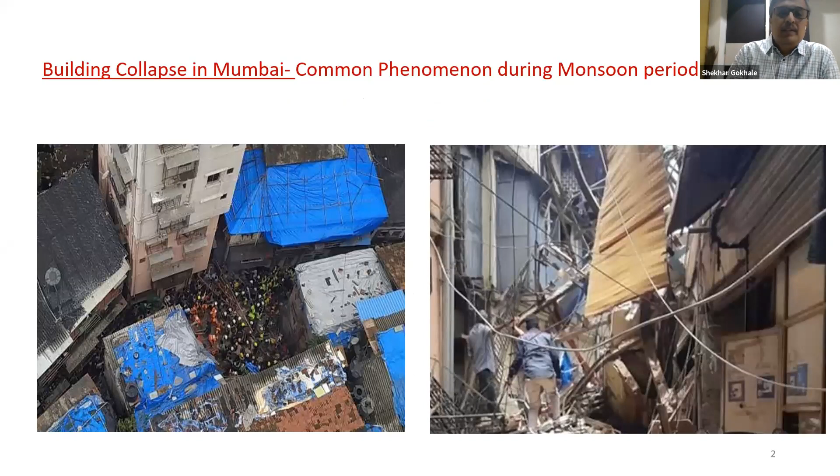I will start with today's topic. This is a very common phenomenon during the monsoon period every year in Mumbai, where there are a number of building collapses for the last so many years. Recent ones are the Bhendi Bazaar collapse of 2018 and the staircase collapse of a Khar building in 2019. These are the two latest collapses in Mumbai.

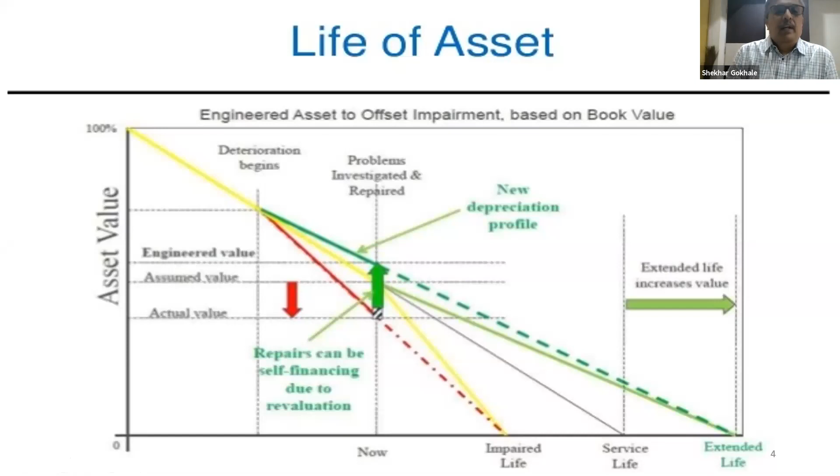Now let us come to the structural audit. What is structural audit? Structural audit is an overall health and performance checkup of a building, like a doctor examines a patient. Structural audit is an important tool to know the real status of the building and should highlight and investigate all the risk areas and critical areas.

We can list out the purpose of structural audit as follows: to save life and property, to know the health of your building and to project the expected future life, to highlight the critical areas that need to be attended to with immediate effect, to proactively assist the residents and the society to understand the seriousness of the problem and the urgency required to attend to it, to increase the value of the asset by timely analyzing the condition of the building, and to comply with municipal or any other statutory requirements. These we can state as the purpose of the audit. This basically gives proactive assistance to the residents to understand the seriousness of the problem in advance, so that the building can be repaired before there is any problem with the building.

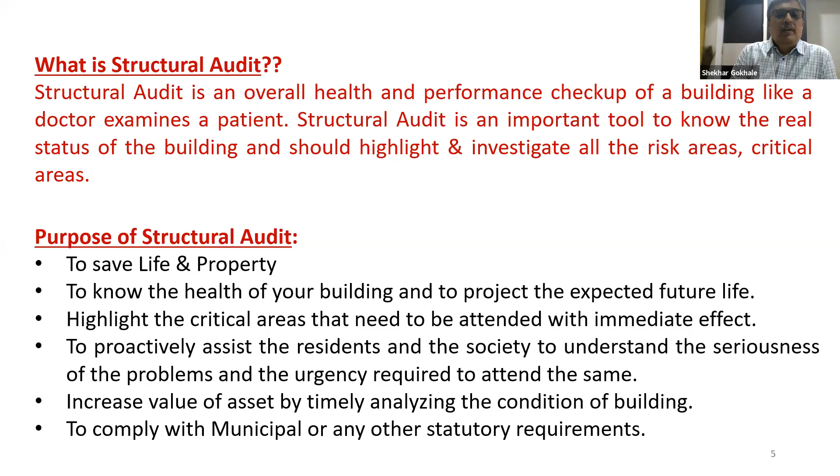There are certain statutory provisions made in the bylaws, like the amendment made in the Maharashtra Municipal Corporations and Municipal Councils Act 2008, dated 7/2/2009, in which structural audit has been made mandatory. Then, to check the fitness of the buildings for human habitation is made in this provision. Examination by structural engineers is made in this provision, and it has been enforced with immediate effect. So all these municipal acts are amended. In the Mumbai Municipal Corporation Act 1888, insertion of section 353B has been introduced.

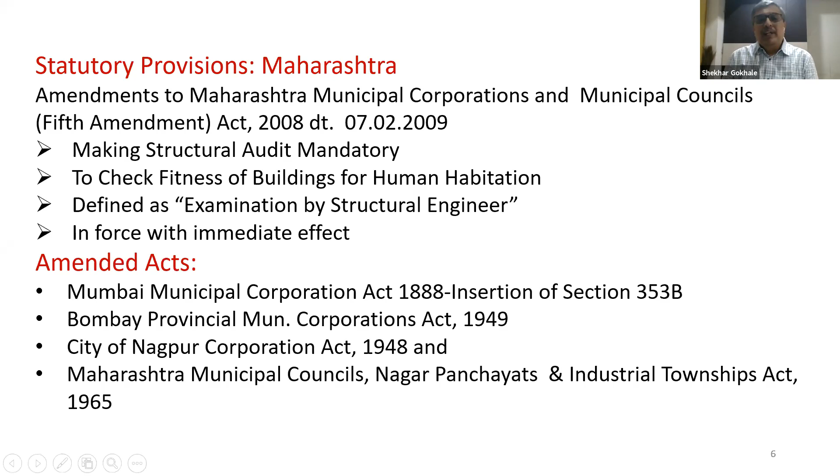Similarly, the model bylaws of the cooperative societies are also amended. There is a clause 77 which says that the society shall cause the structural audit of the building in the following cases. Up to 15 years from the completion of construction, no audit is required. Between 15 years to 30 years, audit is required to be carried out every 5 years. And beyond 30 years from the completion of construction, structural audit is required to be carried out after every 3 years.

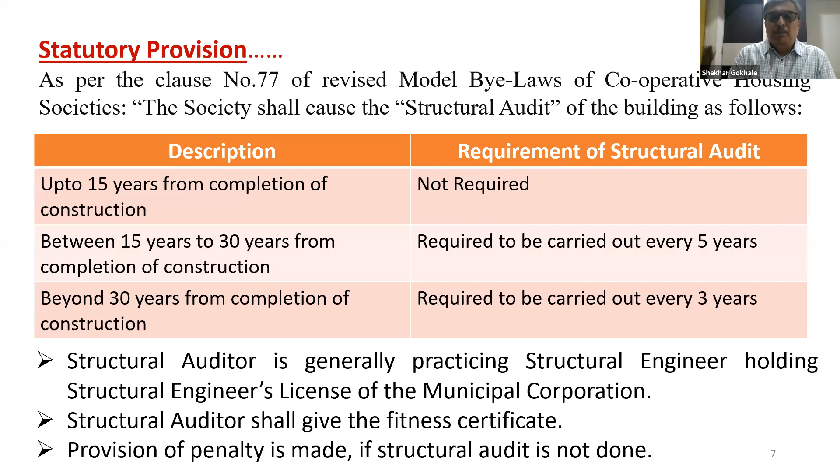So a structural auditor is generally a practicing structural engineer holding a structural engineer's license of the local municipal corporation, and the structural auditor shall give the fitness certificate to the building. And there is a provision of penalties also made if structural audit is not carried out. So these are the changes made recently in the last 8 to 10 years in the bylaws and in all the statutory provisions. In Mumbai Municipal Corporation, they call it section 353B, which is inserted in the original MMC Act of 1888.

Because of this change made in the bylaw, the municipal corporation is authorized to ask the societies or building owners. They are empowered to exercise their power under this act to ask the owners of the building to get the building examined by a licensed structural engineer and submit the structural audit report within 30 days.

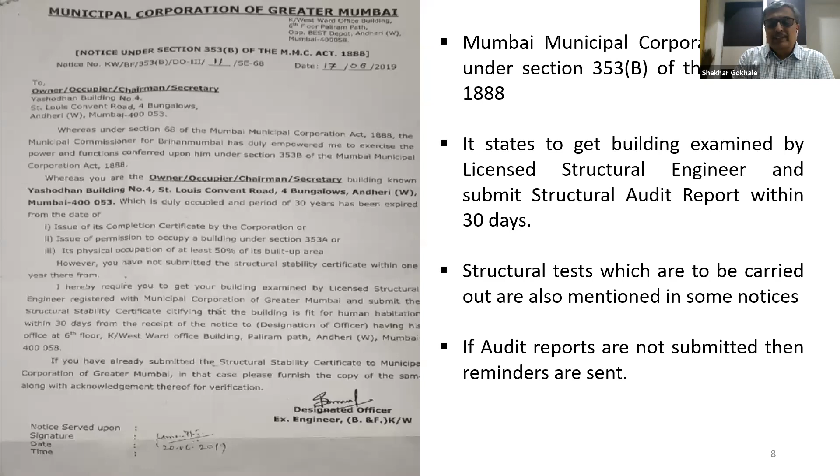Now, to carry out the structural audit, to what extent should we assess the building? We have made 3 levels. Level 1 is a condition survey. Level 2 is a little more detailed survey, and level 3 is structural analysis and capacity checking of the structural members. Normally, we do level 1 and level 2 checks. Level 3 checks are not normally done.

Level 3 checks are normally done for buildings where you want to extend the building, like if you want to add a number of floors on an existing old building. In that case, we go up to level 3, wherein we need to analyze the structure again as per the latest and present codes, and then arrive at a conclusion whether the extension of the building is possible or not. Or in the case of dilapidated buildings, where the structure is quite distressed, then we need to carry out these level 3 checks.

So normally, level 1 check is a condition survey where a physical or visual condition survey of the building is made. Then drawings are studied, the history of the construction is understood, and any rehabilitation work carried out earlier, that information is gathered from the owners of the building. This level of assessment is based on experience. Based on the structural engineer's experience, he will visualize things, he will understand the crack pattern and all that, and based on that, he makes the assessment.

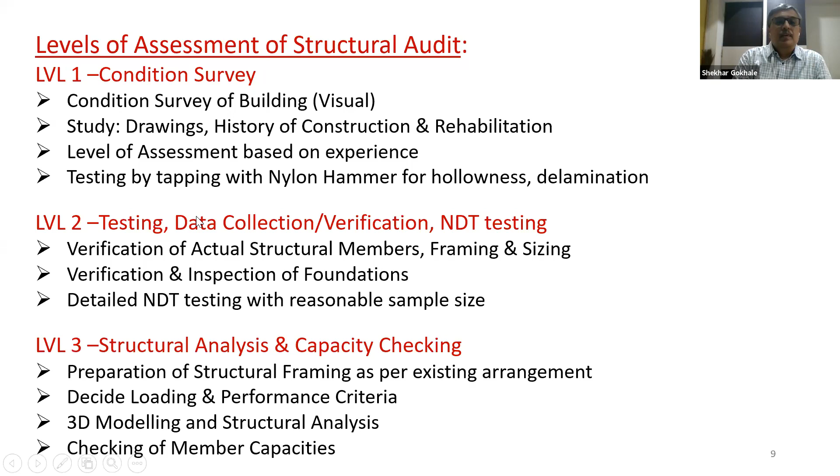Methodology, how to go about. First, you have to find out a competent structural auditor to carry out the work. Generally, the qualities of an auditor: sound knowledge of structural engineering, knowledge of material science and concrete technology, knowledge of construction practices followed in the past, then an inquisitive mind, sound engineering judgment, knowledge to interpret NDT test results. These are the requirements of a structural auditor.

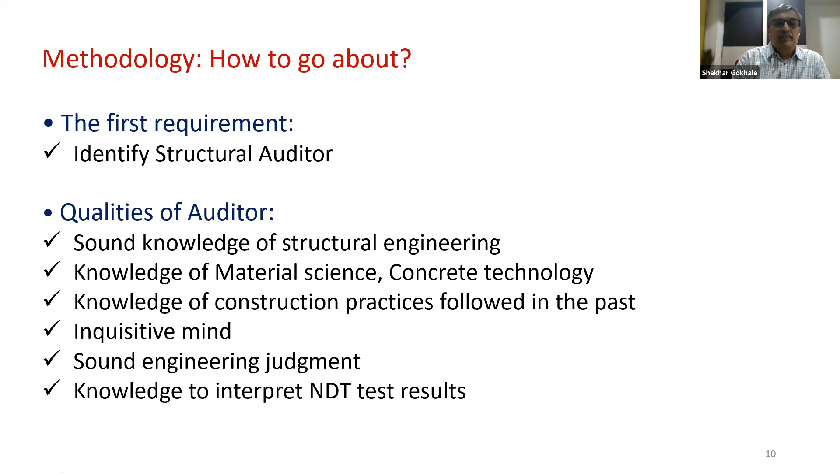Then what are the data required to be collected from the client? Basically, architectural drawings, floor-wise plans to mark the distress points. If typical floors are there, any one floor will do. If every floor plan is different, then we need to get all the plans. Then floor elevation sections to get the dimensions and heights, etc. Then structural drawings: the geotechnical report, foundation drawing, plinth beam drawing, column schedule, floor-wise beam framing plan and schedule,

terrace floor plans, etc. Normally what we observed, most of the building owners or cooperative societies only have the architecture drawings. Structural drawings are very rarely available when we actually start conducting the audit. So most of the time we have to rely mainly on architectural drawings. So normally what we do, we take the architectural drawing, prepare an actual framing plan on the architecture drawing with column numbering, beam numbering and all that, and take the dimensions of the columns and beams and mark all those things on the plan.

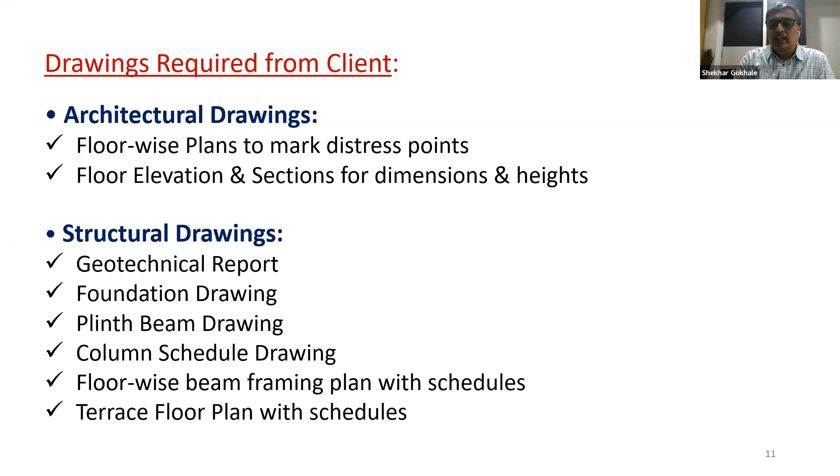And then we use that plan for the actual survey of the building. And whatever differences we notice, we mark it on that. So normally structural drawings are not available. Architectural drawings only are available. So that is a major lacuna in this exercise. Then normally it's a 4-stage plan, we say. Stage 1 is a preliminary plan where we understand the requirement of the client, collect basic information. Means what is the reason for going for structural audit?

We understand whether it is required for BMC purpose, whether it is required to carry out the repairs, whether they want to do it for some bank loan purpose or something like that. So we understand the requirement, then collect basic information about the building: when it was constructed, how many times it was repaired, how many times it was painted, etc. Then identify and collect the useful documents and drawings. Then a preliminary site visit to plan the survey and to record previous repairs. Identify any structural changes or alterations done. So in the preliminary visit, we try to understand what type of alterations, any alteration or change of user has been done, whether the building is designed for residential and it is being used for commercial or vice versa. We try to understand all those things in the preliminary stage.

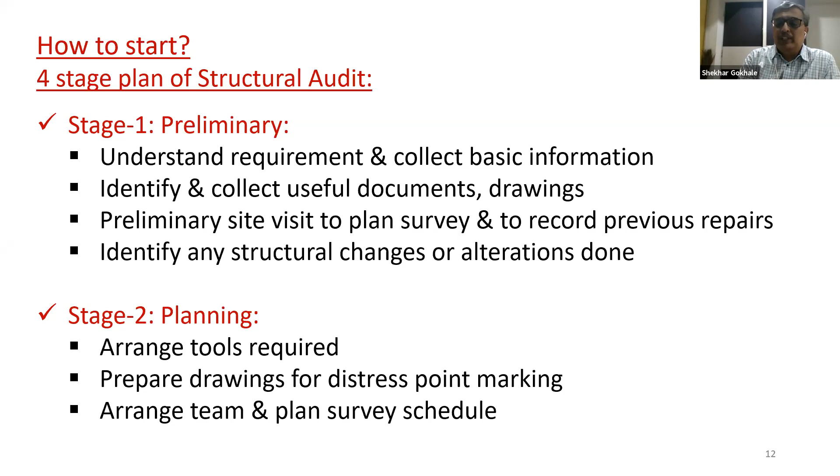Then the second stage is the planning stage, where we arrange for the tools, prepare drawings for distress point mapping. If only architectural drawings are available, we prepare the structural framing plan first before going to the actual site visit. Then arrange the team and plan the survey schedule, etc. So that is stage 2. Stage 1 is preliminary, stage 2 is planning. Stage 3 is the detailed visual inspection. Detailed inspection of all areas with photographic evidence is done. Study and understand the cracks, leakage points, deflection of floors, cantilevers, undulations in flooring, change in the loading pattern, etc.

We observe and record. Discuss with the occupants regarding their problems. Then record plumbing and waterproofing deficiency. Record observations on distress mapping and in various formats. And NDT testing at predefined points. These are the major observations in stage 3: the physical verification, then recording the observations and doing the NDT. That is stage 3.

Stage 4 is the compilation and conclusion. Compilation of data collected and understanding the critical observations, marking all defects on the distress mapping, interpretation of NDT results, and final conclusion about the status of the structure. And the last stage is done at the office level again. Stage 3 is purely a site survey and on-site work. Stage 4 is the total office work.

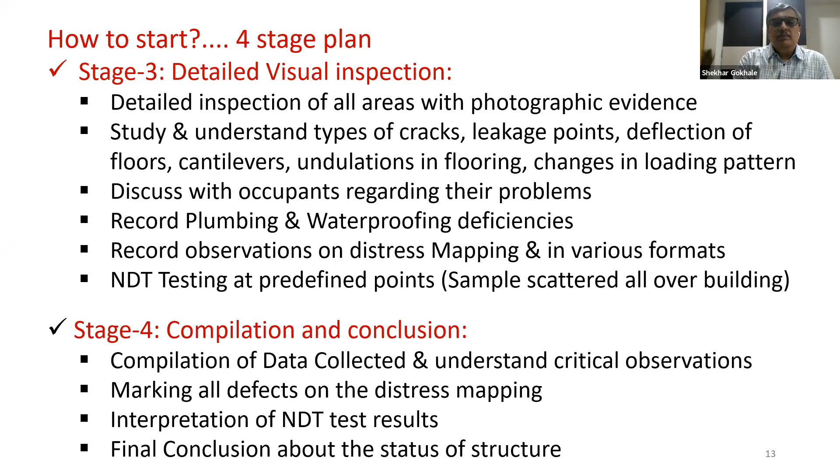Tools required for the structural audit: generally a good binocular, a magnifying glass to check the cracks, a wire brush to open the cracks, Elcometer 143 which is a crack width ruler, and a lightweight nylon head hammer, where we tap the RCC columns, beams and slabs. A ringing sound indicates the substrate is sound.

A dull thud or pokal sound indicates a delamination or hollowness. By the nylon hammer also, we can understand the overall condition of the building, instead of going for extensive NDT, because the number of NDT points can be limited. We cannot have a number of points on every column or beam, so we analyze the structure using the lightweight hammer at multiple points. Whatever observations are made are marked on the distress mapping plan. Non-destructive testing instruments are required.

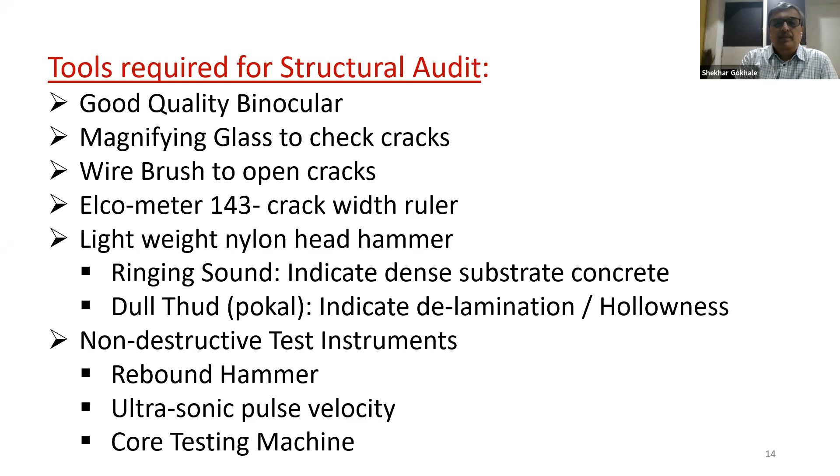First part is the examination, second part is the evaluation, and third part is the prescription, wherein we suggest the remedial measures or structural strengthening measures, etc.

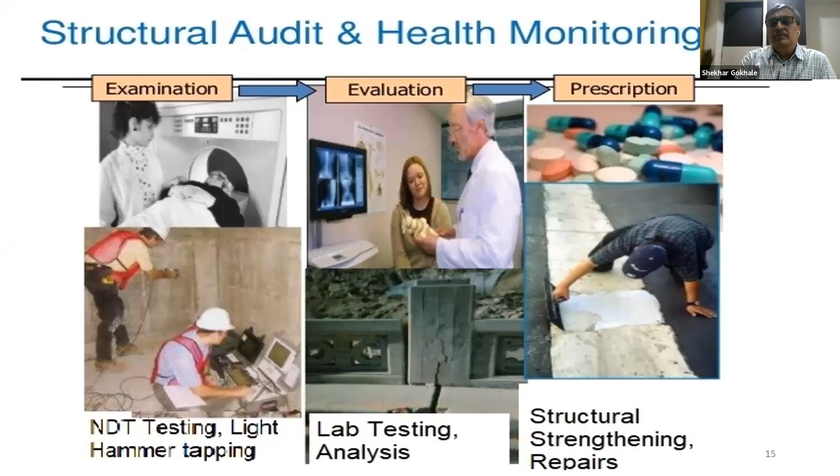Importance of visual inspection: it is a very important step where an experienced engineer is required to carry it out. Preferably, the structural engineer should go himself personally and take all the data or records of the visual inspection, to recognize the types of structural defects through crack patterns.

Crack pattern gives a very good insight into the status of the structure. Various crack patterns give you the type of defect in the building. Then, to identify any signs of material deterioration, or roughness, or whatever environmental influence on the structural members, we can visualize this.

Then identify any signs of structural distress, deformation, deflection due to overloading, any design deficiency or detailing deficiency. If a typical type of cracking pattern is observed in a particular building, from that we can make out if there's any design deficiency or detailing deficiency there. Deformation and deflections also need to be analyzed.

To identify any alterations or additions in the structure which may result in overloading - if there's an increase of floors, floor on floor they are built, or they have made some false flooring, or some walls constructed on the slabs, etc. All these are alterations or additions done after the construction of the structure, and those changes or loading patterns were not considered at the time of design. So all these additional alterations we need to look into.

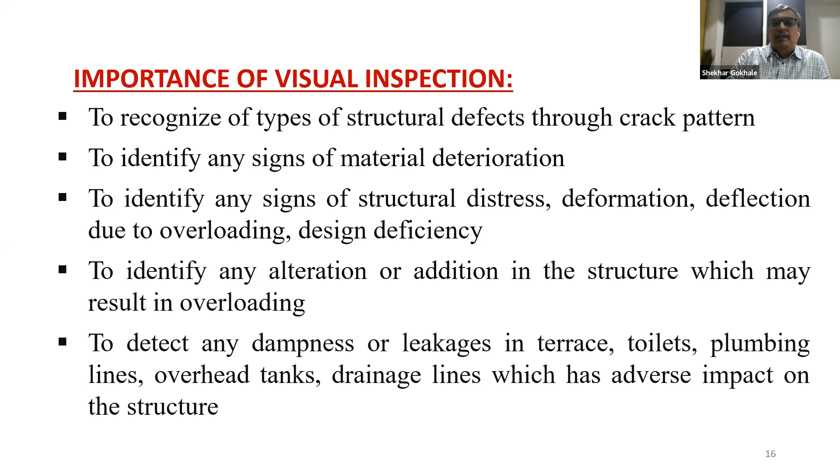Basically, a chemical reaction between cement and water in concrete, when the concrete is prepared - cement and water react to form calcium hydroxide, and this ensures the concrete's alkalinity. Concrete is generally alkaline in nature with a pH value of 11, and this alkalinity provides protection to the reinforcement bars from corrosion. If the concrete is dense and properly made with a proper mix design, the pH value is around 11 or more.

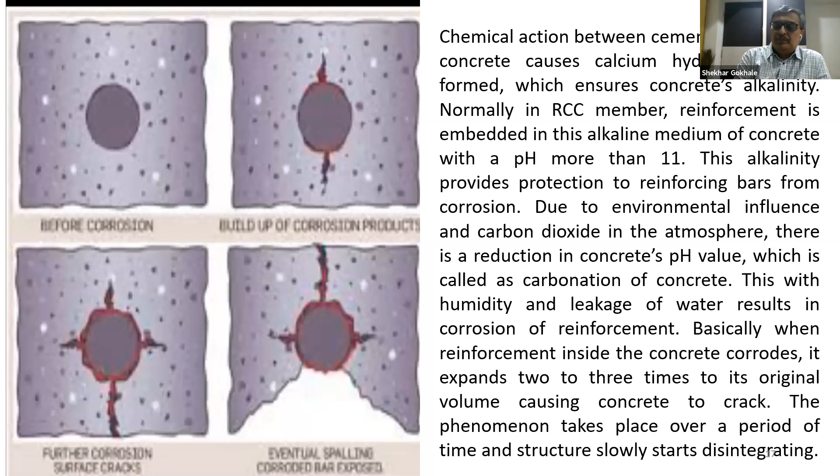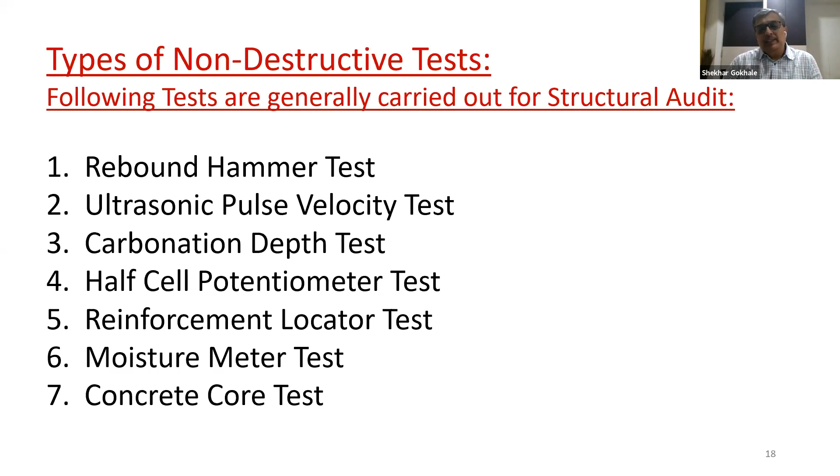Now, the types of non-destructive tests we normally carry out. There are a number of non-destructive tests, but these are 7 tests which are commonly used. One is the rebound hammer test, which is called the Schmidt rebound hammer test. Second is the ultrasonic pulse velocity test, then the carbonation depth test, half cell potentiometer test, reinforcement locator test, moisture meter test, and concrete core test. I'll come one by one to all these tests.

This is the rebound hammer test, which has to be conducted on the bare concrete surface, meaning plaster has to be removed before the test is conducted, and the surface is scraped and cleaned before the test. This instrument is held perpendicular to the surface and pressed against it, and the spring-controlled mass rebounds, and the extent of rebound gives us the surface hardness of the concrete. The hammer reading is locked when we press the plunger to the surface, and the Schmidt rebound value is recorded on the scale on the instrument. This rebound value gives the estimated value of compressive strength based on the graph provided by the manufacturer.

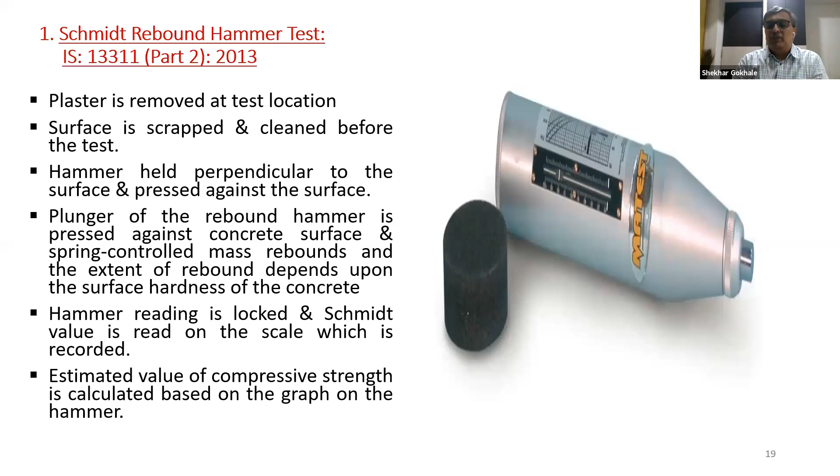The second test is the ultrasonic pulse velocity test, wherein there are 2 probes. We can see in the diagram, there is a concrete block, and on both sides there are 2 probes. One probe is used to transmit the pulse, and the other is for receiving it. The time of travel of an ultrasonic pulse through a given path length of the concrete is measured. The thickness of this block is the path length, and the travel time is measured on the display, and the path length divided by travel time gives us the UPV.

The UPV depends on the quality of concrete and is affected by all its ingredients. If there is any discontinuity in the cross section, or the cover concrete is delaminated, etc., then we get a lower UPV value. Then this method can be used in 3 ways.

The photograph shown is a direct method where both the probes are on the opposite side of the member. There could be a semi-direct method, when two sides of the member are exposed, like a column. The width of the column, the 230 side, is exposed and the other length side is exposed. Then the probes are applied on the 230 side and on the length side. That is called a semi-direct method.

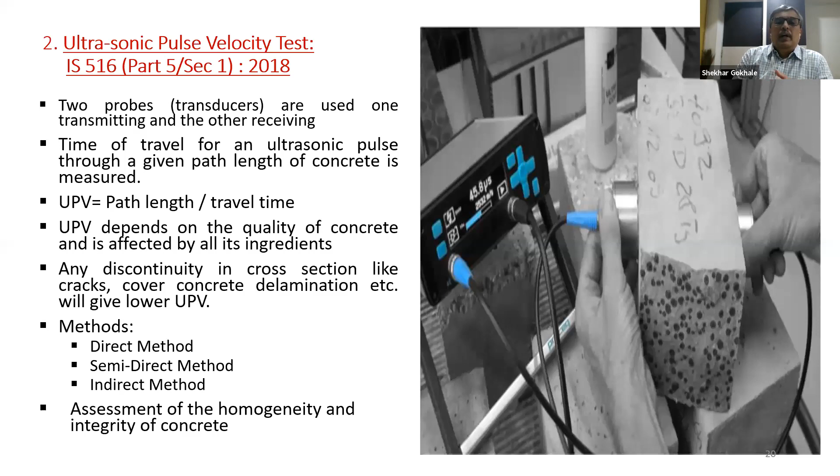Then the carbonation depth test. Carbonation I have already explained, where there is a reduction in the pH value of the concrete. Holes are drilled in the concrete, and phenolphthalein solution is spread in that hole, and there is a color change. Based on the color change, we can make out up to what depth the carbonation has gone inside. So if the cover concrete of the column is, say, 40 mm, and the carbonation depth as per this color change is, say, 25 mm, that means the carbonation has reached a depth of 25 mm, but has not reached up to the reinforcement level, since the cover is 40 mm.

So there is some more time before the onset of reinforcement corrosion. That we can make out from the carbonation depth test.

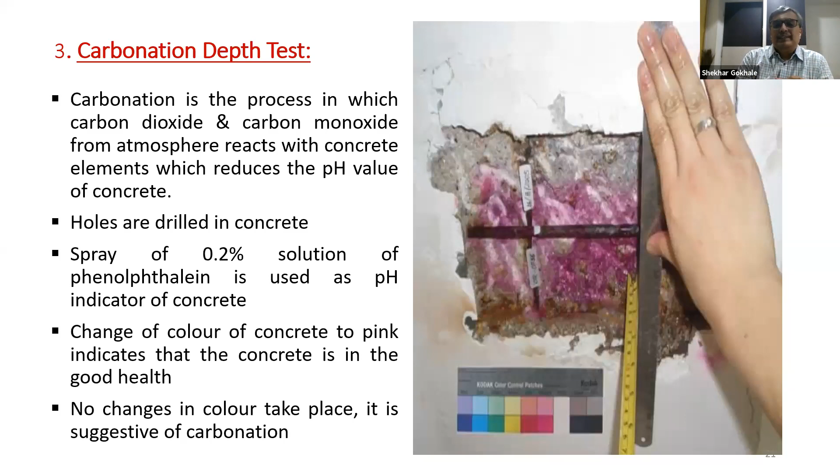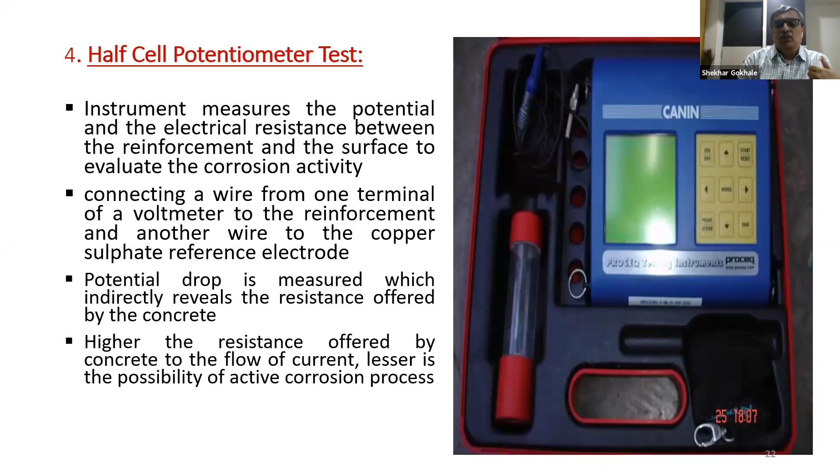The fourth test is the half cell potentiometer test. This is an instrument which measures the potential and the electrical resistance between the reinforcement and the surface to evaluate the corrosion activity. Here a wire is connected to one terminal of the voltmeter and to the reinforcement, and another wire to the copper sulfate reference electrode. Potential drop is measured, which indirectly reveals the resistance offered by the concrete. The higher the resistance offered by the concrete to the flow of current, the lesser is the possibility of an active corrosion process. So based on that, we can predict the probability of corrosion. It will not give the extent of corrosion, it will give the probability of corrosion.

Then the reinforcement locator test. This is called a profometer, wherein we can move the probe on the surface of the column or a beam and identify the location of the reinforcement bar. It gives the location of the bar as well as the approximate diameter of the bar. Using this instrument, if we have the structural drawings available with us, we can cross check whether the bars shown on the drawing are actually provided in the construction.

If there are 8 numbers of 16 mm TMT bars or Tor steel bars used, whether there are 8 bars or not, or whether the diameter of the bar is 16 mm or substantially different, that we can identify from this. So it's a useful tool to cross check whether the actual construction is done as per the structural drawings or not. This also gives the concrete cover. What is the concrete cover provided for the particular member?

And this test is also useful before the core test is conducted, because to extract the core from the member, we need to locate the reinforcement bars inside the member, so that while extracting the core, the reinforcement bar is not damaged. So this is useful for that also. The only limitation is that the depth of rebars from the concrete surface should be less than 70 mm, and the spacing of bars should be more than 150 mm. Then only this test can be conducted.

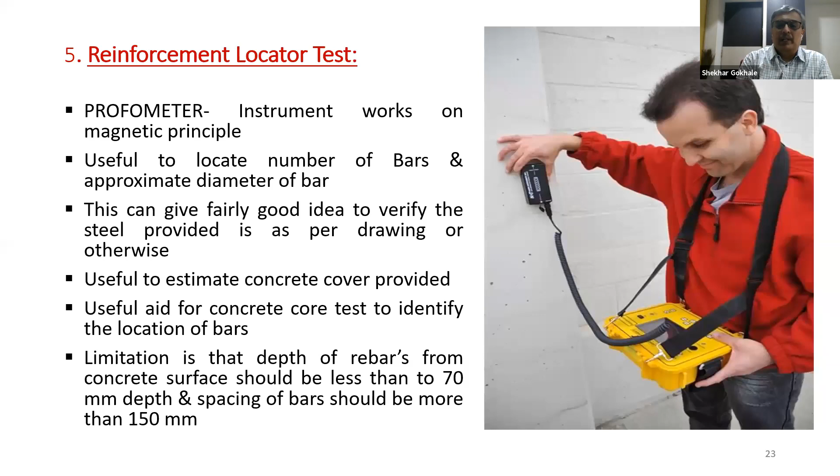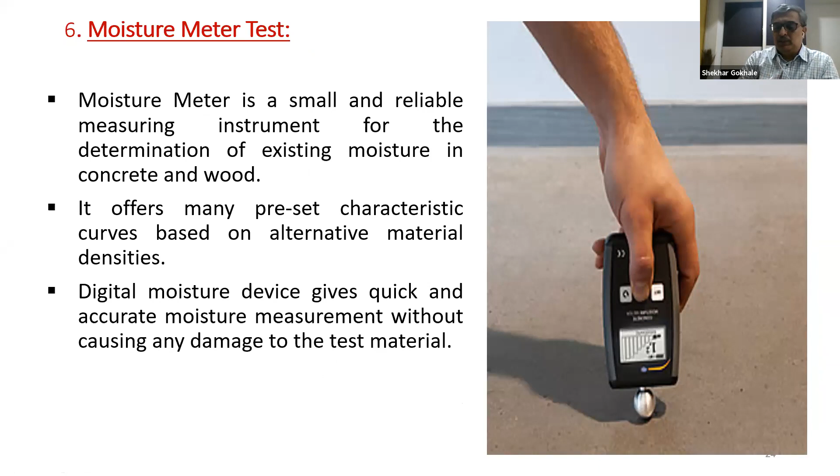Then moisture meter. A moisture meter is a small and reliable measuring instrument for the determination of existing moisture in concrete and wood. This can be used for wood also. It offers preset characteristic curves based on alternative material densities. And digital moisture devices give quickly and accurately the moisture measurement without causing damage to the test material. Measure the moisture content in the surface.

There is a core test, wherein a reinforcement is first located using the profometer to avoid the bars. Then cores are usually extracted by drilling using a diamond tip core cutter cooled with water. There's a diamond cutter, and a cylindrical core is extracted from any concrete member where we want to test it. This core is normally 75 mm in diameter, because more than 75 mm may not be possible because of the crowding of the bars in the RCC member. Normally a 75 dia core is taken, and the core is actually tested in the lab for compressive strength.

And the concrete, after crushing the core, the other chemical tests such as pH value, chloride content, sulfate content, etc., can be done in the lab. So this is a confirmatory test, like a cube test. This actually gives the actual compressive strength of the member which was constructed some time back. The rebound hammer test and ultrasonic pulse velocity test can give erroneous results sometimes, but this is a more accurate test, and we can rely on this test.

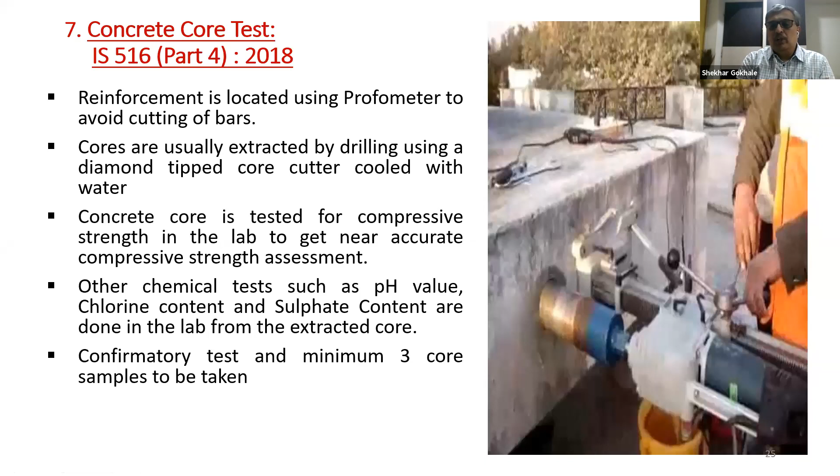And normally we suggest we should take a minimum of 3 samples. Even if a very small building is there, we should take 3-4 samples so that we can average out the equivalent cube strength. If the extent of the building is more, then we can definitely have more core tests. So the core test gives a fairly good idea about the concrete strength of the building.

Some time back, we compared 3 different buildings of different age groups. Say Andheri Shilpa building was constructed in 1977-78, Shweta building was constructed in 1981-82, and Aditya building was constructed in 2004-2005. All 3 are RCC frame structures, more or less all 3 buildings were ground plus 7-story structures, and we carried out all 4 tests: ultrasonic, rebound, half cell, and carbonation, and we compared the results.

So the 1977 building gave ultrasonic results below 3, Shweta gave 3 to 3.5, and Aditya gave 4.2 to 4.8. Normally a UPV above 4.5 kilometer per second is an excellent quality concrete. So in the case of Aditya building 2004-5, which is a comparatively new building, we got the best results. And for the 1977-78 building, we got a result lower than 3, which is a poor quality concrete.

And we did the rebound hammer also. We got a range of between 10 Newton to 18 Newton per mm square. For the 81-82 building 16 to 20, and Aditya building 22 to 27 Newton per mm square. Whereas as per the present code, it should be more than 20 Newtons per millimeter square. Earlier it was 15. Then half cell potentiometer, we got -244 to -281, -112 to -217, and -80 to -115.

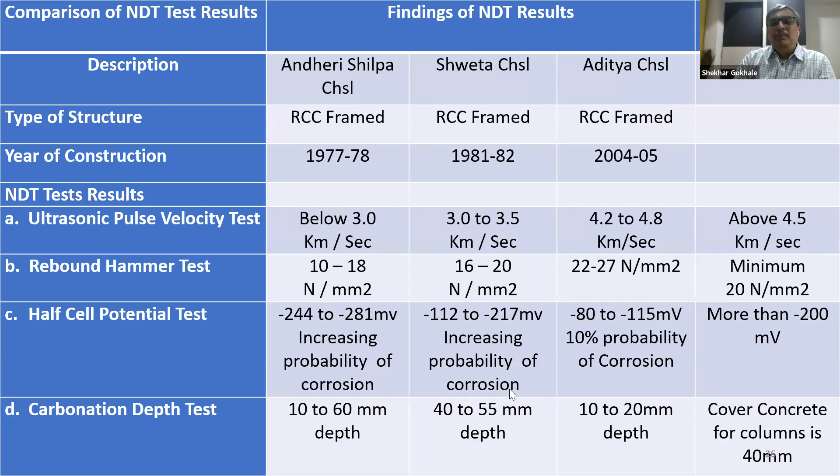The limitations of these tests. Basically, NDT tests are for a particular location. At a particular location, it will give the reading, the strength, the probability of corrosion and all that. And based on that, we have to extrapolate our results for the entire building. So firstly, we should have sufficient sample size. That is the first thing, and we have to look from the proper perspective, from visual inspection as well as NDT. We have to take all things together and then extrapolate results to the entire building.

Sometimes we get good results in the rebound hammer, but bad results in the ultrasonic pulse velocity. So if there's quite a big variation in both the results, then we normally go for the core test, and based on the core test, we decide the fate of the building.

Readings are to be taken on a smooth bare concrete surface. It should not be taken on a plaster surface. If plaster surface readings are taken for rebound hammer or ultrasonic pulse velocity, then we are likely to get erroneous results. Even if the concrete surface is cracked, readings taken on that surface will be erroneous. So you should not take the reading directly on the cracked surface. It should be adjacent to the cracked surface.

If a large aggregate or reinforcement is near the surface at the point of test, then we are likely to get higher results. So sometimes what we do is take 2-3 different readings in the nearby area and then average them out to get a value for that particular test location. Half cell tests on epoxy coated steel do not give accurate results. And if calibration of the instrument is not done, that may also give erroneous results. So all these limitations are there in NDT testing.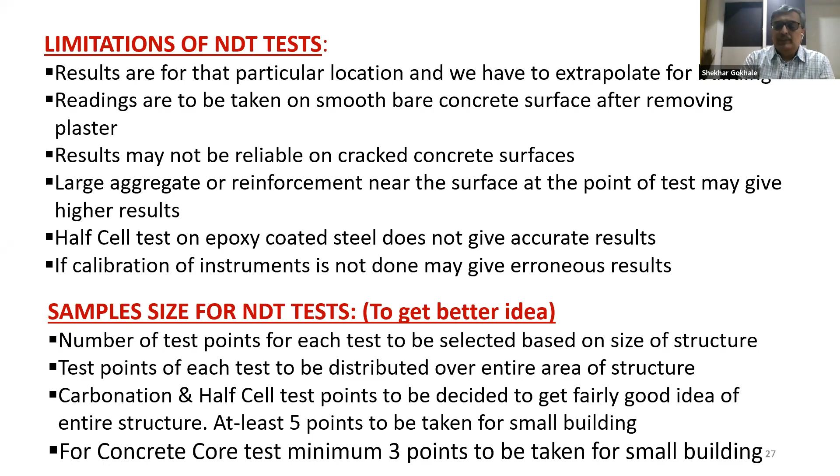Sample size I already explained. The sample size has to be consistent with the quantum of the building you are analyzing. So accordingly, you have to select the number of test samples. Now we go to the case study.

I have taken a very small ground plus 2-story building, which was constructed in the 1970s, for today's webinar. It is in Vileparle East in Mumbai. This is the building, called Vithal Building, Vithal Society. It is a ground plus 2-story structure. Year of construction 1972, approximately 48 years old. External appearance doesn't look very bad. It looks to be okay.

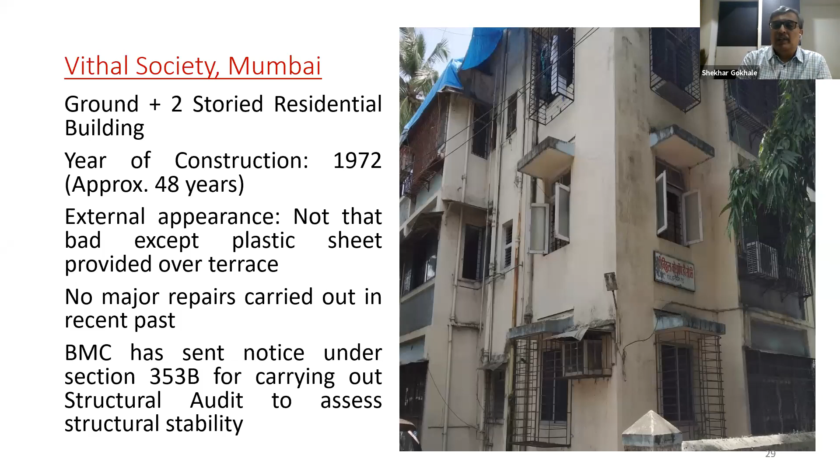But the only thing, the plastic sheet provided on the terrace, indicates there is some problem in the building. No major repairs were carried out in the recent past. Last repairs were carried out in 1999, and after that nothing has been done. BMC has sent a notice under section 353B for carrying out a structural audit to assess the structural stability. So the objective was to do the structural audit for BMC purposes and also for carrying out the repairs, if at all they are required.

As per what I explained, we have 4 stages. The first stage objective was to carry out the audit for municipal submission and to carry out repairs. No major repairs were carried out. Only architecture plans were available. Structural drawings were not available. A basic structural framing plan was prepared based on the architecture drawing, with columns and beams located on the plan with their sizes. External photographs were taken, but no other details were available. So preliminary stage 1 is over.

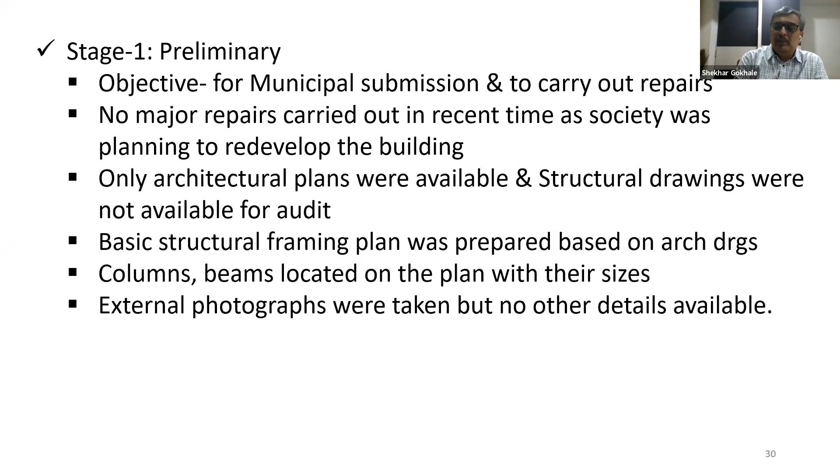Stage 2: we decided to carry out rebound hammer at 20 points, ultrasonic pulse velocity at 10 points, carbonation 5, half cell 5, and concrete core 3 points. Drawings were prepared for the distress point marking. Then a team of 2 engineers was planned for the condition survey of the building and a team of 3 technicians for NDT testing. We noticed that certain residential flats on the ground floor were converted to offices, and in a few flats the kitchen was converted to a bedroom and the balcony converted to a kitchen. These were the additions or alterations done in the building that we noticed in the stage 2 inspection.

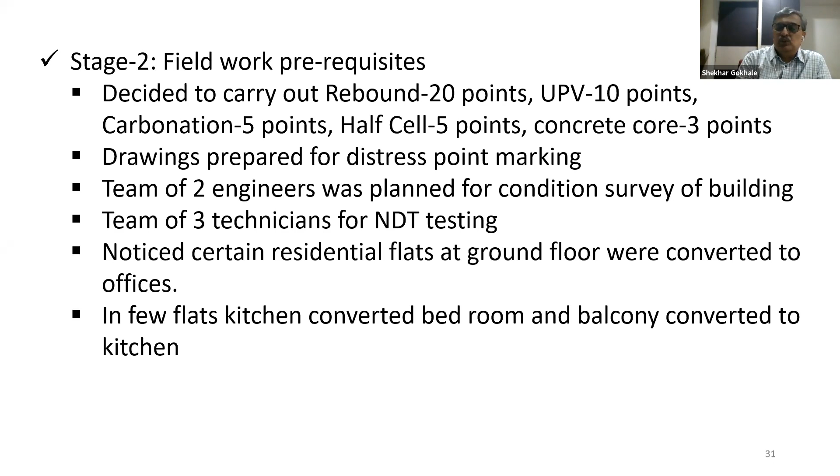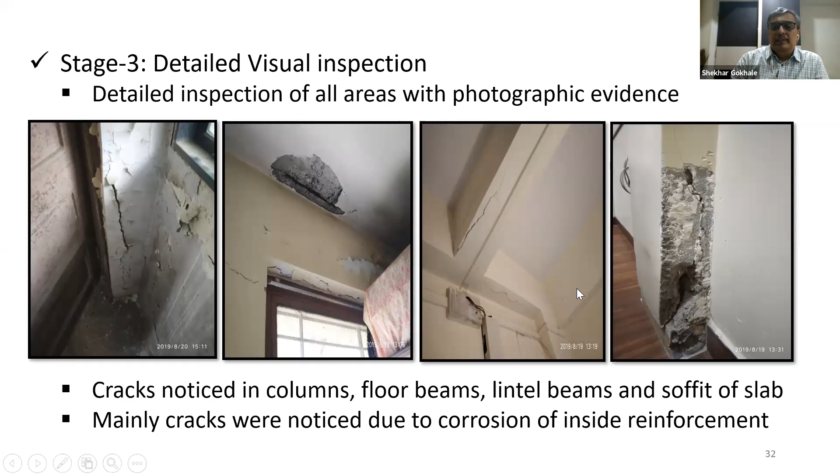Stage 3 inspection, the detailed visual inspection. We created photographic evidence of the detailed visual inspection. These are 4 photographs from that particular building where we observed a vertical column crack due to corrosion, and some spalling of concrete in the slab. In the lintel beam we also observed a bottom crack, which is also due to corrosion. The beam bottom crack was also noticed here and here. Then a major distress was noticed in the column, again due to corrosion. All these cracks are mainly corrosion cracks.

Then we observed a plumbing problem, leakage problem, terrace leakage problem, and leakage in the soffits of the loft slabs over the toilet blocks. We further noticed that in some of the flats there is unevenness in the flooring. The flooring along the wall across the short span direction was at a higher level, and the central portion of the tiling was slightly lower. A gap had developed along the tile joint, indicating corrosion in the negative reinforcement.

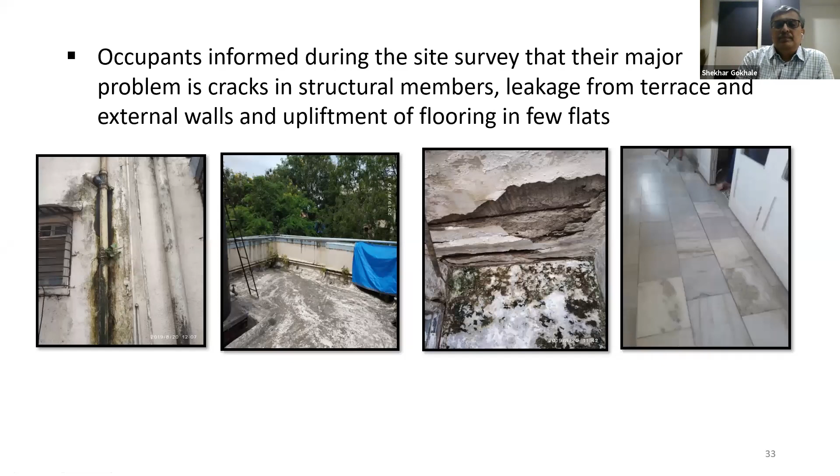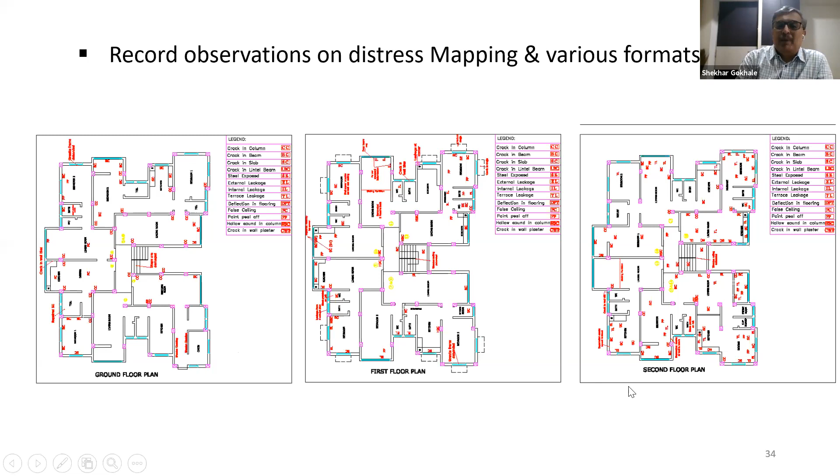With some legend, we can mark all the defects and distress points on the plan at the appropriate floor level, and these are quite useful in analyzing the structure afterwards. So this is called distress mapping, which is a part and parcel of the structural audit report.

Then we prepared some internal inspection reports, wherein the flat number or room number is written, then the room name: living room, kitchen, bedroom, etc. Structural distress in column, beam, and slab, if we notice, we mark it there. Leakage, dampness, external wall, ceiling, or internal walls, we mark it there. If there is a deflection or undulation in the flooring observed, we mark it there. And there is a remarks column to write the things which cannot be accommodated in these columns. So this type of charts we prepare.

We prepare similar charts for external walls also, where instead of room number, we use a wall number, wherein each wall of the external face of the building is marked with A, B, C, D, E, etc. And with the floor number, like A wall ground floor is called AG, A wall first floor is called A1, A2, A3, like that. So with a wall marking and a floor level, we identify all the distress points and leakage points on that chart, which is also a part of the structural audit report.

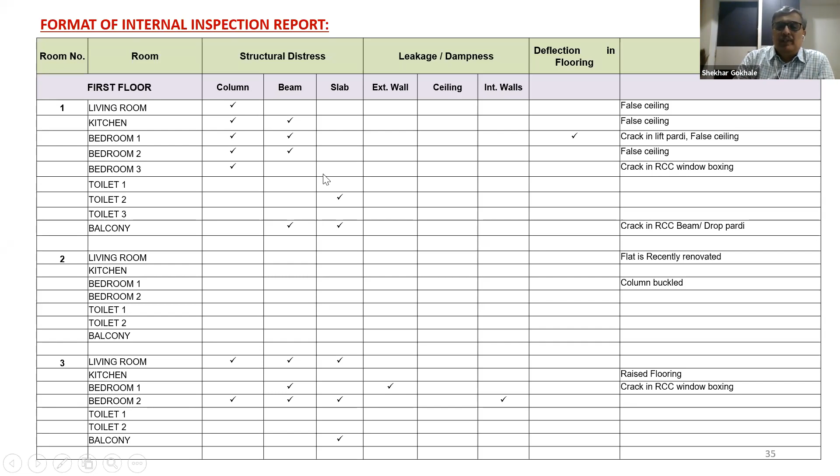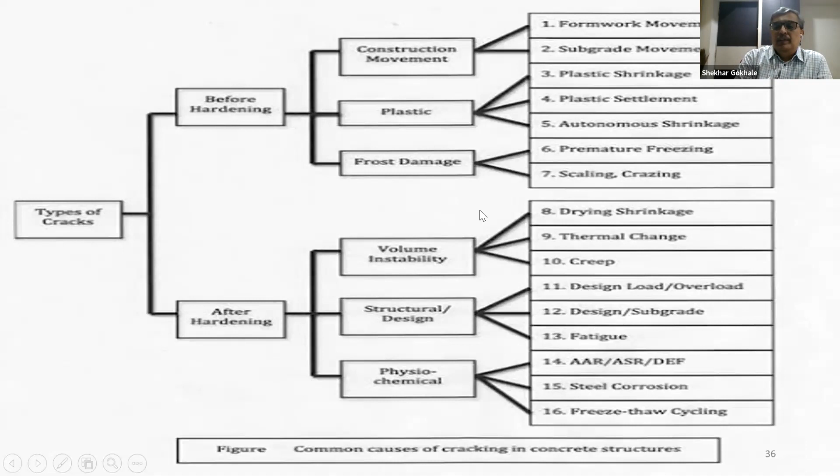Those could be volume instability, structural or design cracks, or physio-chemical cracks. So in this, we have mainly design load and overload cracks. We have to analyze design and subgrade cracks, then steel corrosion cracks. These are the three main cracks we have to analyze during the structural audit. Similarly, after hardening, cracks can be identified as physical cracks, chemical cracks, thermal cracks, or structural cracks. For our purpose, chemical cracks and structural cracks are important.

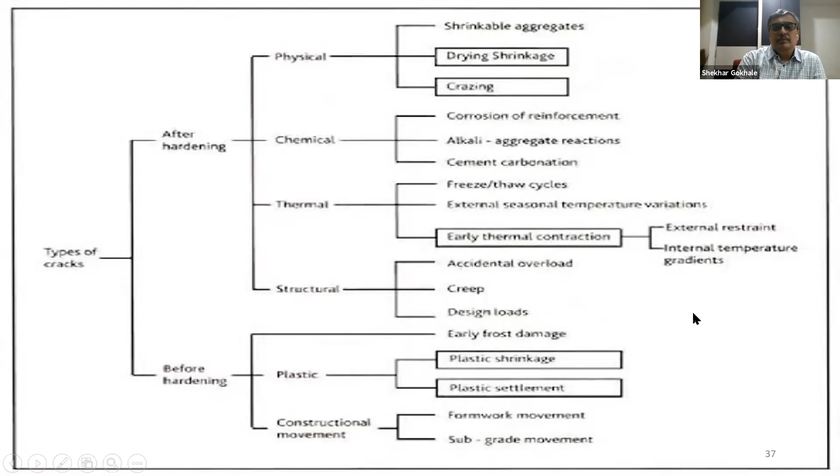Then if this is a plan, if there are a number of cracks on the bottom of the beam, these are also corrosion cracks. If there are a number of bars inside the beam, then there will be a number of cracks. Then cracks due to the bending stress at the center of the span are developed. That is due to the bending of the beam because of overloading or something like that. Then cracks due to compression failure in the beams: if there is any impact load or a failure of concrete, then such cracks develop.

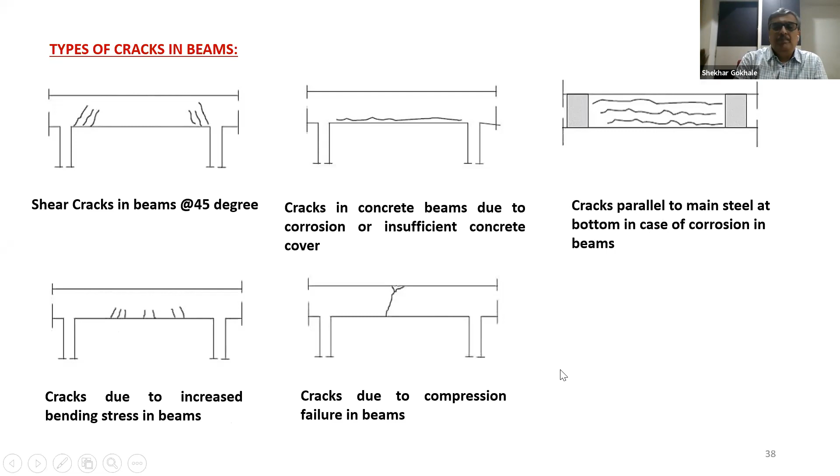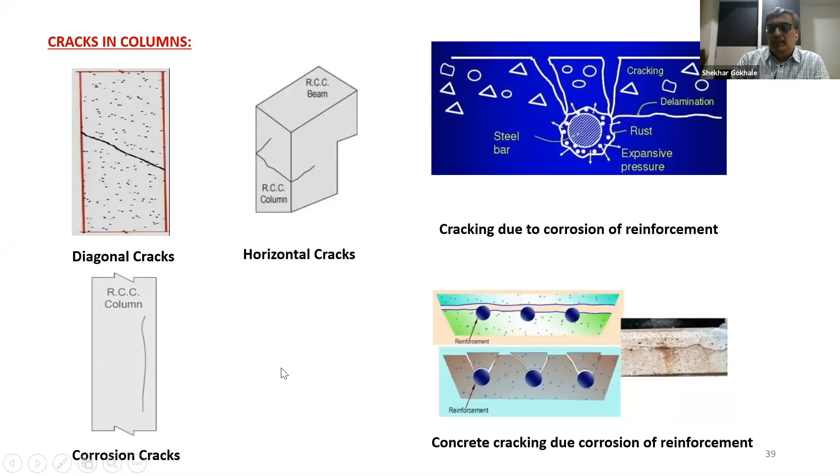In columns also there are diagonal cracks, horizontal cracks and corrosion cracks. Mainly we encounter corrosion type cracks. Like here, it is explained that the diameter of the reinforcement bar goes on increasing, and then spalling of concrete takes place. This is a splitting crack because of the overload on the column. There is a bending of the reinforcement also noticed in this, due to overloading on the column. And these are again the flexural and shear cracks in the beam because of the loading.

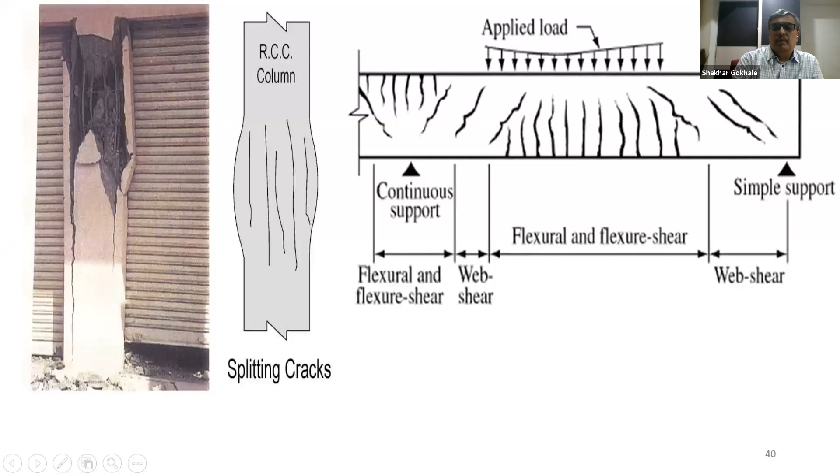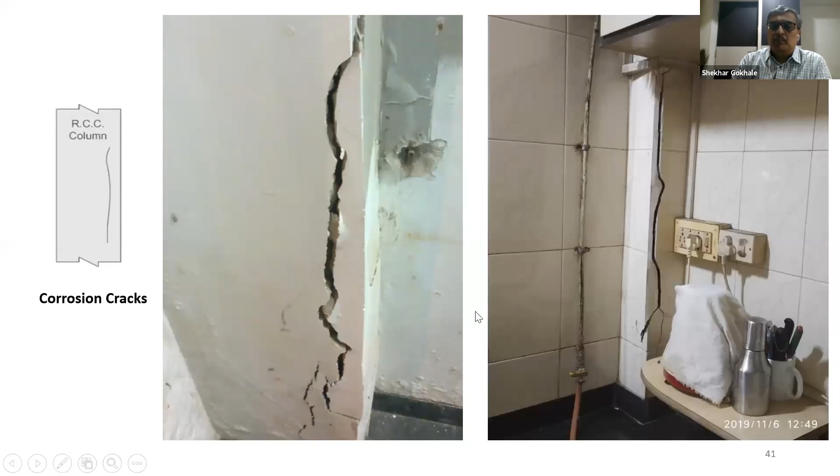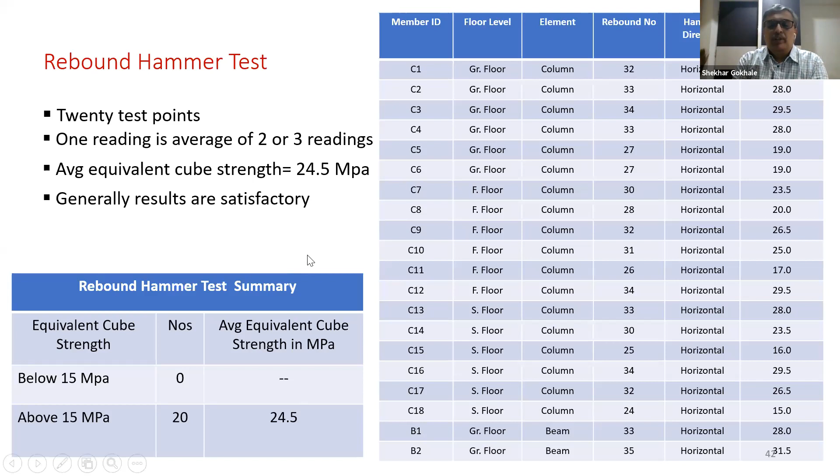Then we carried out 10 points of UPV test. These are again, out of those 18 columns, we have taken few columns and 1 beam. Here we observed the difference. Most of the readings are doubtful and poor. So if we summarize the result, the velocity between 3 to 3.75, 2 readings are in this range, where the average UPV is 3.27, and below 3 there are 8 readings giving average UPV of 2.43 km per second. So all the readings are of either doubtful quality or a poor quality.

So these two tests are giving contradictory results. Your rebound hammer test is giving very good results, and this test is giving poor or doubtful results. So this indicates there are cracks. UPV test results are low if there are micro cracks inside the concrete, or homogeneity of concrete is not good. If the concrete is not properly densed or compacted, then the UPV results are low, indicating it is a doubtful or poor quality concrete. So even though rebound hammer is giving good results, ultrasonic pulse velocity test is giving very unsatisfactory results.

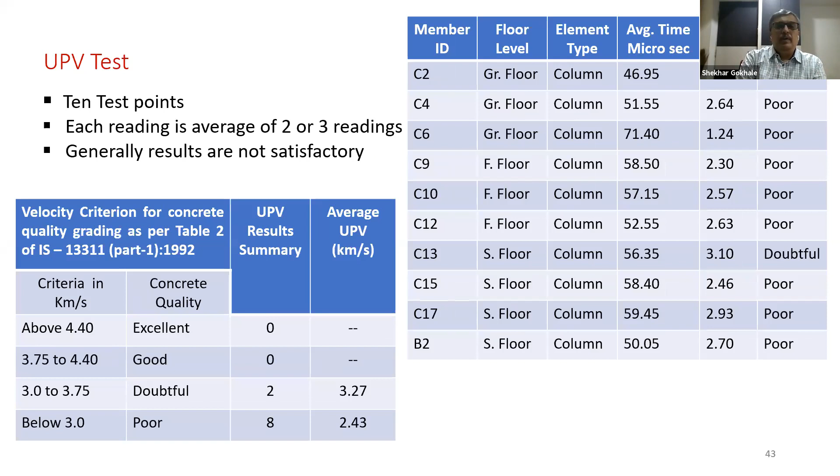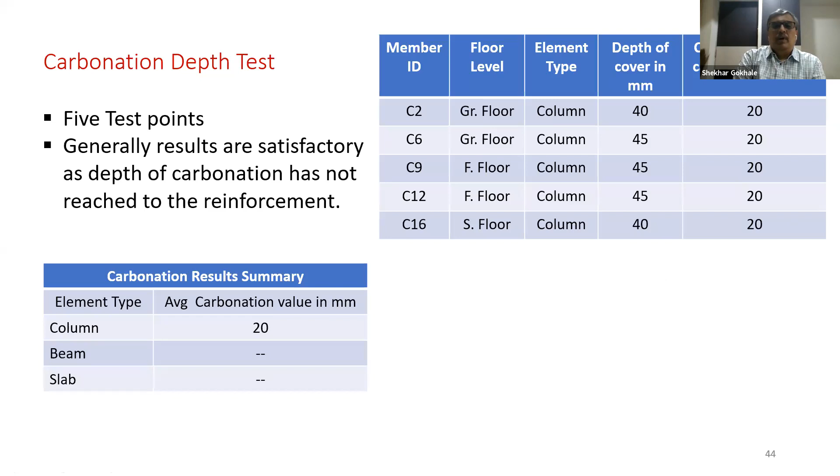Then we further carried out the carbonation depth test. The general cover of the column was around 40 to 45 mm observed at site, and actual depth of carbonation is about 20 mm in all the 5 cases where we tested only columns. Then half cell potentiometer test, again we tested the 5 columns. Out of 5 we got all 5 readings between -200 millivolt to -350 millivolt range. That indicates probability of active corrosion about 50%. So even though the carbonation depth is only 20 mm, there is a 50% possibility of active corrosion

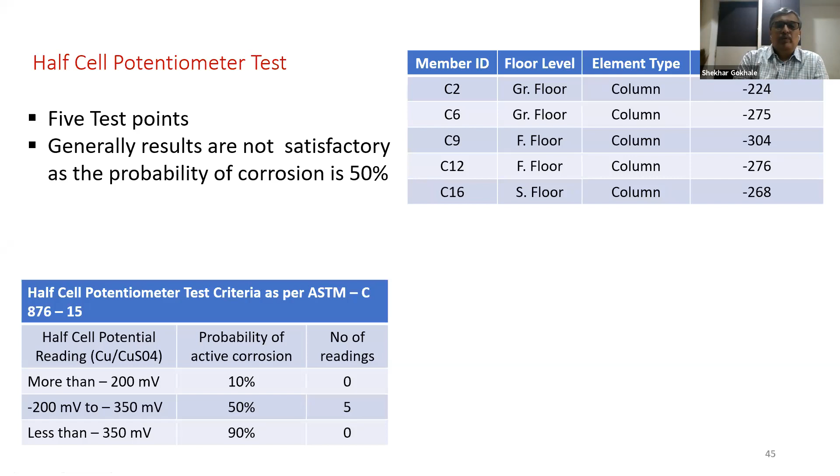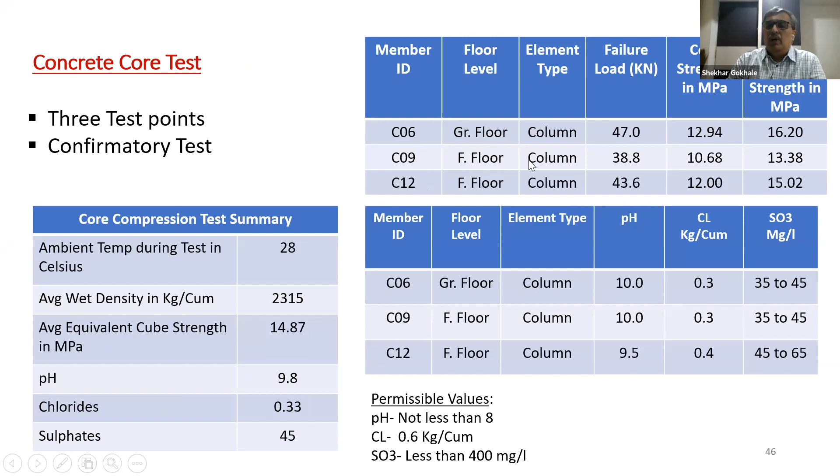in the reinforcement. So to conclude, we carried out concrete core test at 3 samples, column number 6, 9 and 12 at ground floor, first floor and first floor. We took the results, and equivalent cube strength given is 16.2, 13.38 and 15.02, which is averaging to around 14.87 Newton per millimeter square. So this is more or less equal to the design concrete strength the designer must have considered at the time of construction of the building, because in 1972 for a ground plus 2-story structure, designers used to take M15 grade of concrete only, nominal mix concrete. So this is more or less equal. With some standard deviation we can apply, and we can consider the concrete strength is reasonable.

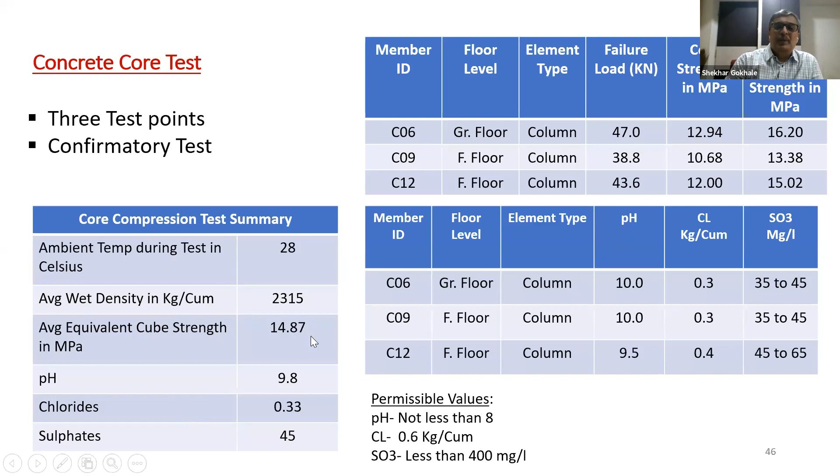The pH value observed was around 9.8 of the crushed core. After crushing, we took the pH value of that crushed sample, and average pH value of 3 samples is 9.8, chlorides is 0.33, and sulfates is 45. So as far as pH value is concerned, it has reduced from 11 to 9.8, indicating carbonation of concrete. Chloride contents and sulfate contents are within the limits. Chloride should be below 0.6 and sulfate should be less than 400 milligram per liter. So chlorides and sulfates, there is no issue. pH value reduction indicates carbonation of concrete, and cube strength, we can say as a confirmatory test, is around M15.

So, contents of the structural audit report. Now we go to the fourth stage of the structural audit, wherein we compile the data and prepare the structural audit report. So we should have a covering letter, then preamble, that means who has appointed whom, purpose of appointment,

details of the building, that is address, number of floors, flats, type of roof, RCC, staircase or tank, lifts, etc. Then type of structure, whether it's RCC, steel, composite, load bearing, whatever. History of the building, date of construction, structural alterations, past surveys and repairs. All those things we need to record and write in the report. Date of inspection is also required to be mentioned. Validity of the report also should be mentioned, like the validity of the structural report could be for the next 6 months.

You have to mention that specifically. Structural audit observations, wherein cracks, leakage, deflection, settlement, plumbing and waterproofing defects you need to mention. Room-wise internal inspection report you can include in this. Photographs indicating distress areas are required to be indicated in the part of the report. Distress mapping sheet should be included in the report.

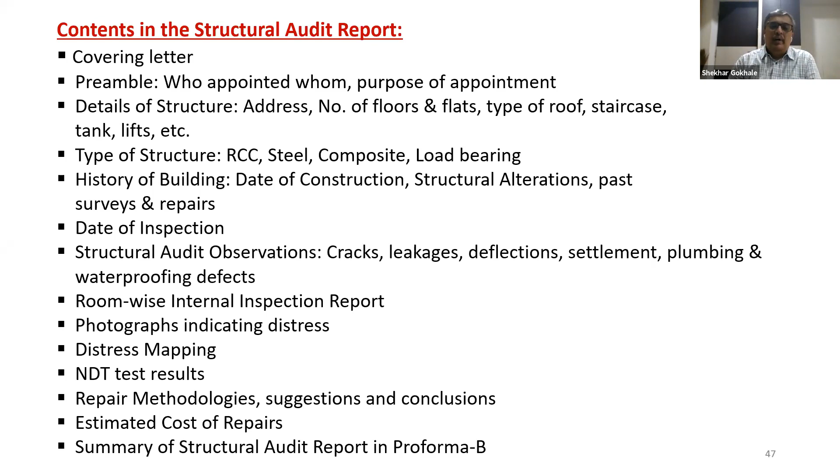In Mumbai Municipal Corporation, they have given a pro forma B to the structural engineers. There is a standard format given wherein all this information which is mentioned above can be given in a summarized fashion. So I'm displaying the pro forma B.

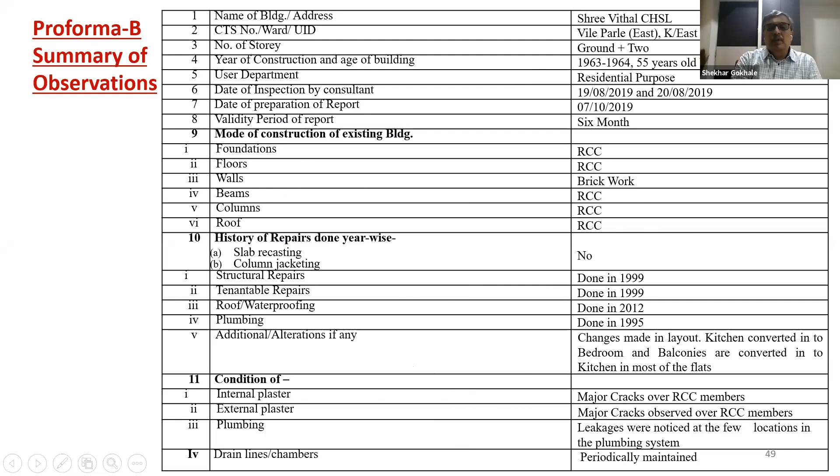Of the building, year of construction, age of the building. This particular pro forma is given with a date of inspection, date of preparation of report, etc. Foundations and beams and columns are which type. Then when the last structural repairs were carried out, any additions, alterations are there. External plaster, whether it's cracked, internal plaster, whether it's cracked. About plumbing, information is asked for. All these rows we have to fill in.

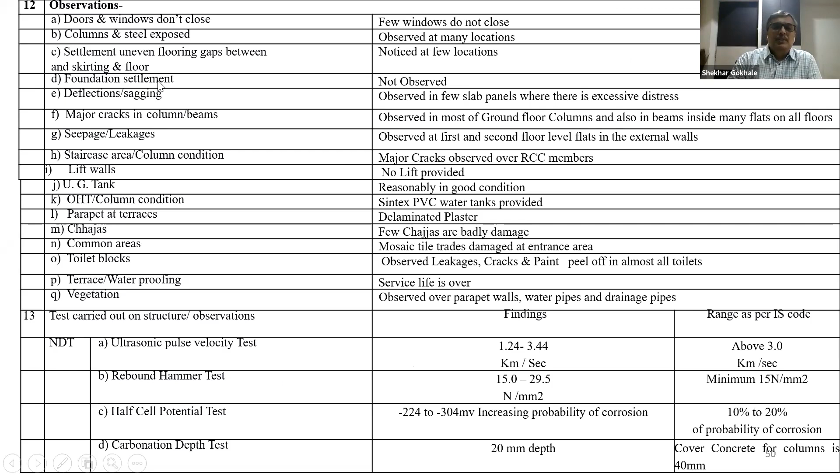They are specifically asked whether doors and windows do not close. If there is any settlement of the lintel beams, then settlement of uneven floorings, gap between the skirting and the flooring also need to be mentioned. Deflection, sagging of the slabs, if observed, needs to be mentioned. All these details you need to fill.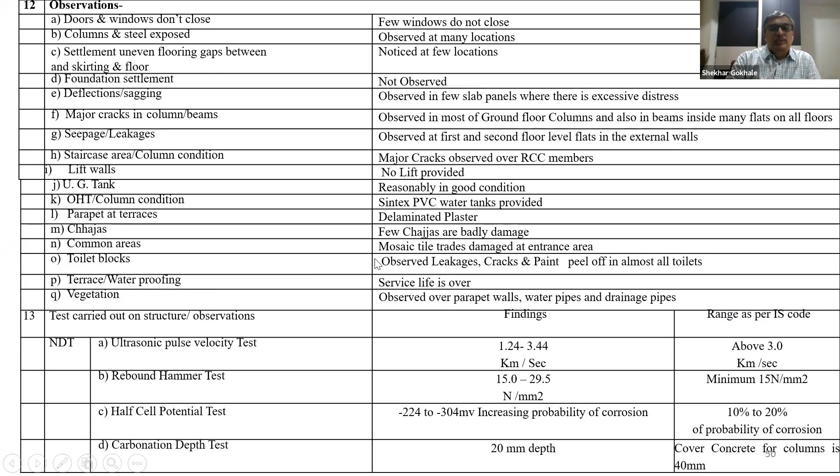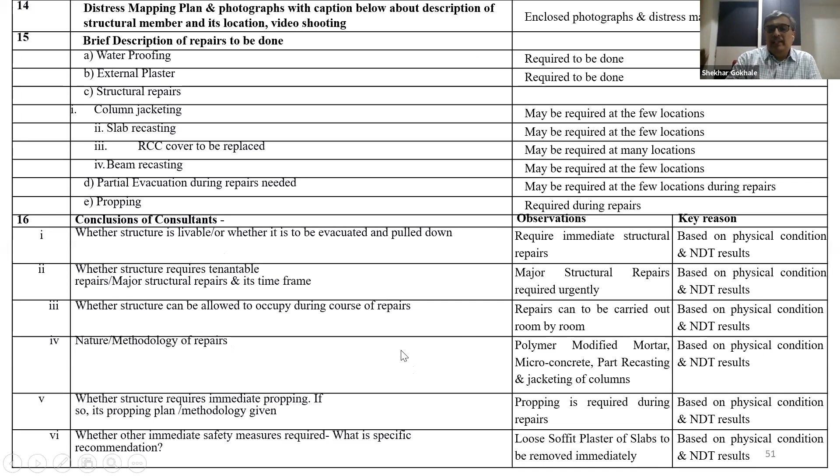You have to summarize your non-destructive test results also in this. Then conclusions of the consultant are to be written. They have got different questionnaires. We have to go on answering the questions. And finally, classification of the buildings they are asking. They have made 4 different categories. In Mumbai Municipal Corporation, they call it a C1.

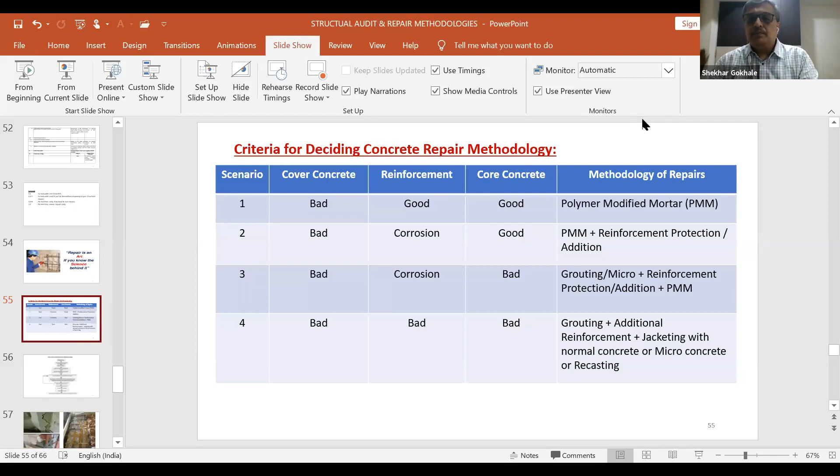Reinforcement used is Fe 415 grade. Beams are designed as simply supported and framing action is not considered. Ductile detailing is not provided. Few additions and alterations carried out in the building, kitchens converted to bedroom and balcony converted to kitchen, but no deflection of balcony cantilever noticed. Cracks in the RCC members are basically due to corrosion, steel exposed in quite a few columns. Uneven flooring, tiles and gap between flooring and skirting noticed, indicating sagging tendency in the slab.

RCC chajjas over windows are badly cracked and delaminated. Some of the column cracks are severe and need to be repaired immediately. Soffit of some of the slabs is substantially cracked and delaminated, and loose portion needs to be removed immediately to avoid accidental fall. Leakage from external walls indicating delaminated external plaster. Terrace waterproofing is bad and needs to be replaced to avoid seepage of water in terrace slab. Plumbing pipes need replacement. These are the critical observations and findings from this particular structural audit inspection.

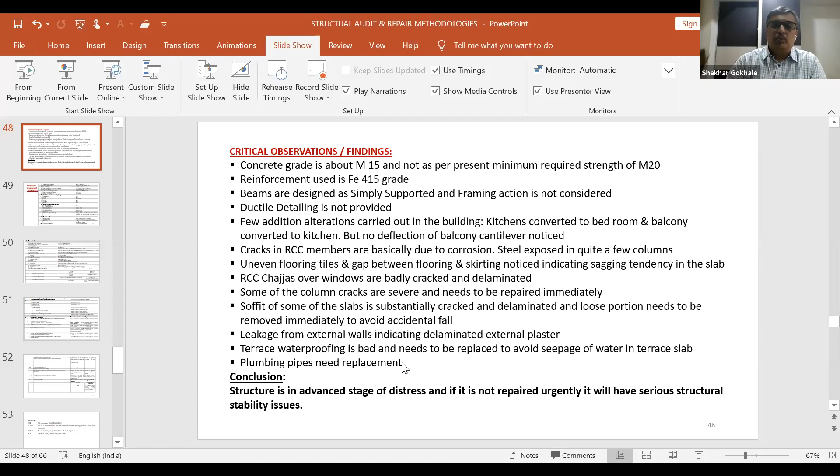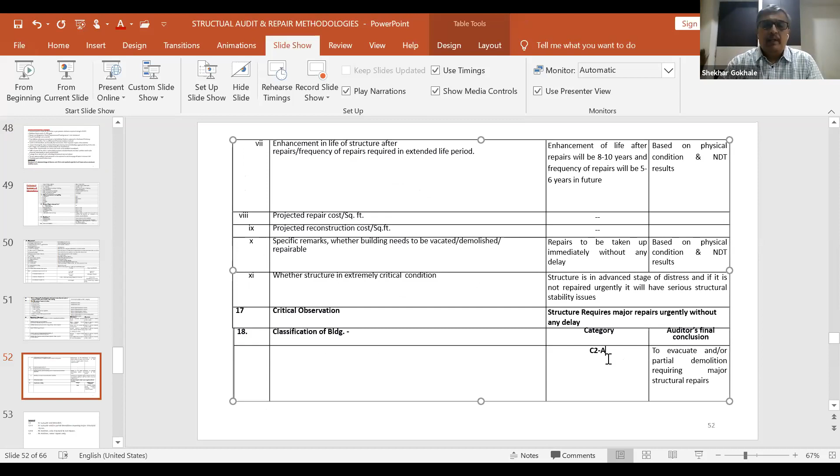So our conclusion is structure is in an advanced stage of distress, and if it is not repaired urgently, it will have serious structural stability issues. So building is repairable, but it needs to be repaired efficiently. This is the conclusion of the report. We have given a category C2A, wherein a partial evacuation or partial demolition may be required, and major structural repairs are required in the building. This is the conclusion of the structural audit of this building.

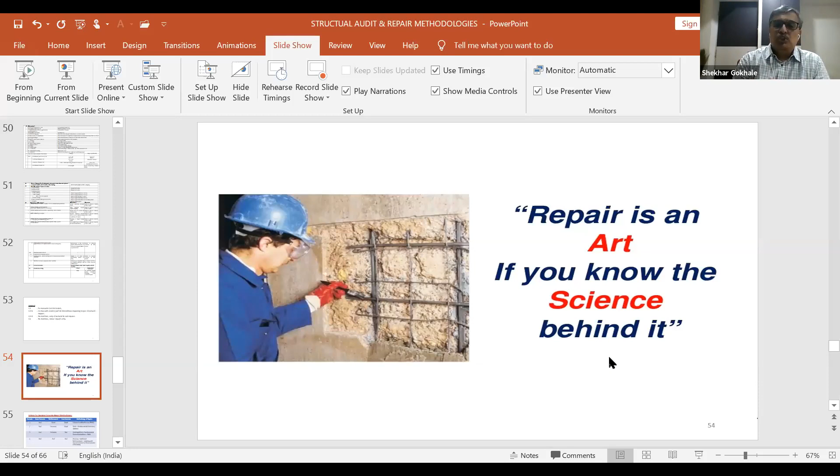So we understood how to carry out the structural audit. What are the levels of the structural audit? In this case, since there is no extension of the building, they are basically planning to go for redevelopment after a few years. So there is no vertical expansion of the building required. So level 3 type of audit is not required. Only first and second level audit we carried out in this case. In most of the cases, this is the way the structural audit